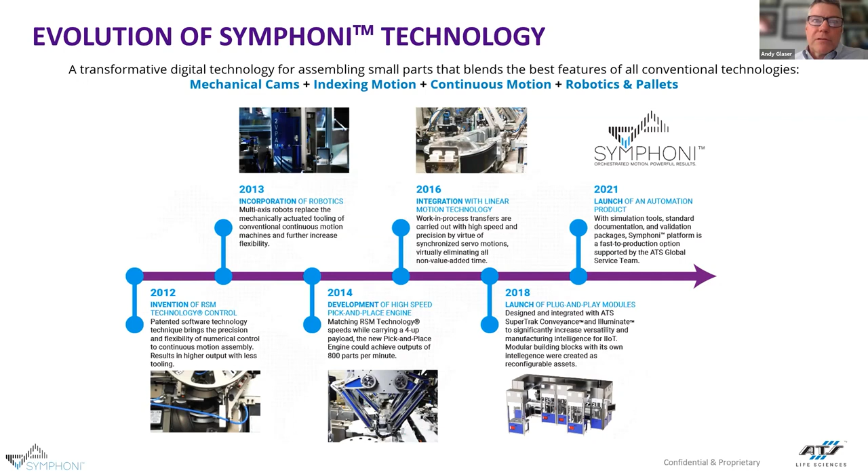So ATS recognized the game-changing potential of Symphoni. It's a standardized modular automated technology. It offers high performance, precision, and flexibility. In other words, a machine that didn't have to sacrifice speed for flexibility and vice versa, and a machine that offered an alternative to cumbersome, time-consuming custom solutions.

The best part about Symphoni for many of our clients is the fact that you can start with just one of these modules, as you see on the slide. You can use that module, and we call it Sonata, for research and development, your clinical trials, for prototyping, before you have to go into low output or higher output. And then when you're ready to scale up, you can just simply add more modules.

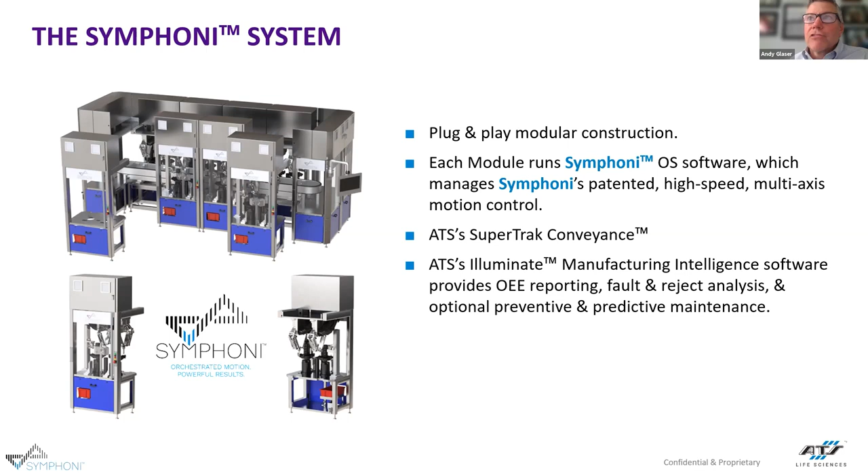This inherent potential for scalability and simplicity is a big part of what ATS saw as a solution to solve current assembly problems. The Symphoni asset is completely deployable, and that is a game changer. We also saw a far more specific synergy, a way to incorporate our SuperTrak conveyance technology and our Illuminate smart manufacturing software. These technologies significantly build on the core premise and make Symphoni the complete package it is today for anyone in the med device assembly business.

So what does all this give you? In short, Symphoni provides the lowest total cost of ownership because of its standardization, modularity, ease of use, and low maintenance. Symphoni improves product quality because of its gentle part handling with friction-free orientation. Symphoni reclaims expensive floor space because of its reconfigurability, as well as its ability to be continually redeployed throughout its life. Symphoni optimizes your assembly equipment due to its operational flexibility and quick changeover.

Thus, the core Symphoni DNA made up from these attributes is why there is now a totally different approach to how high-speed assembly can be automated. Faster time to market, reduced capital investment, and a lower overall price per part translates to a big advantage for manufacturers. In 2018, when ATS acquired the Symphoni IP and joined the journey of this technology, our CEO, Andrew Hider, said that it was to develop market-leading solutions. With today's generation of Symphoni, we have already demonstrated with real customer projects, we are leading. Now it's time to see for yourselves what I'm talking about.

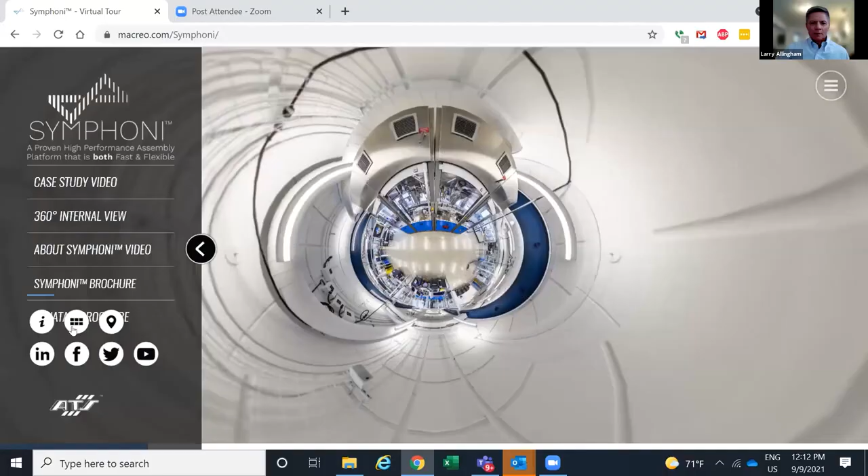So what I'm going to do is first orient you as to what it is that we're going to take a look at and also where it's located. So as you can see on the screen, we've got a Symphoni machine or Symphoni cell, if you'd like to call it that. And this is located at our Innovation Center at ATS in Cambridge, Ontario. So I'll just do a little bit of a scroll here so that you can see how the machine is situated in our Innovation Center, where we're featuring, as well as Symphoni, other examples of ATS technology.

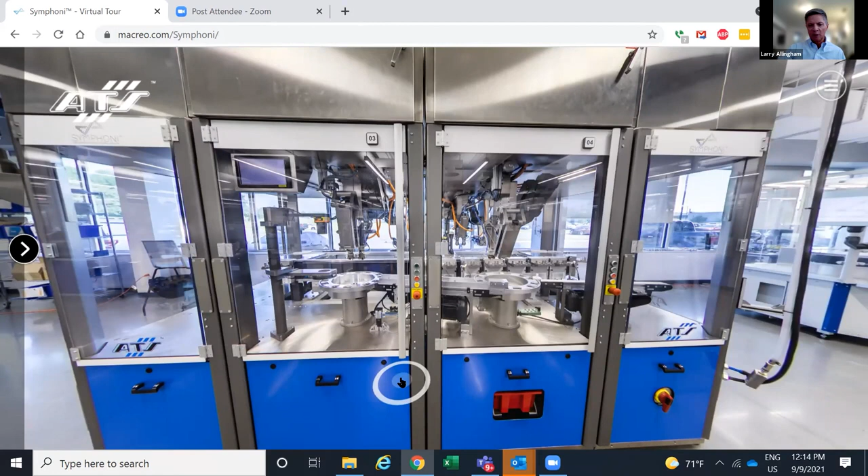So before we plunge into details of the machine, I'll just make a few introductory comments to reiterate some of the points that Andy mentioned and that Peng mentioned in the lead up. So again, Symphoni is the technology. It's designed as a unique combination of high speed and flexible assembly automation, and it's packaged in a modular format, which gives it configurability and reconfigurability, meaning that it's effectively serving as a long-lived asset that can be repeatedly retooled for different applications if need be. So first, to orient you a little bit into what you're looking at here, as we've mentioned a couple of times, Symphoni is modular in nature.

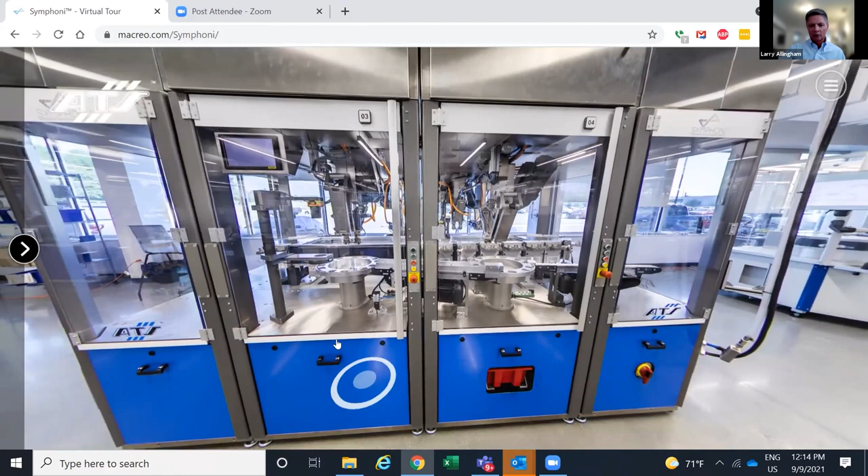And this small cell that we're going to use as our walkthrough this afternoon is certainly an example of that. So you'll notice that this, where I'm taking my cursor here, basically corresponds to a module or a working module. We have two working modules on this side of the machine, two working modules on the back side of the machine, which we'll see a little bit later, and then two other modules that are on the end that we typically refer to as end caps.

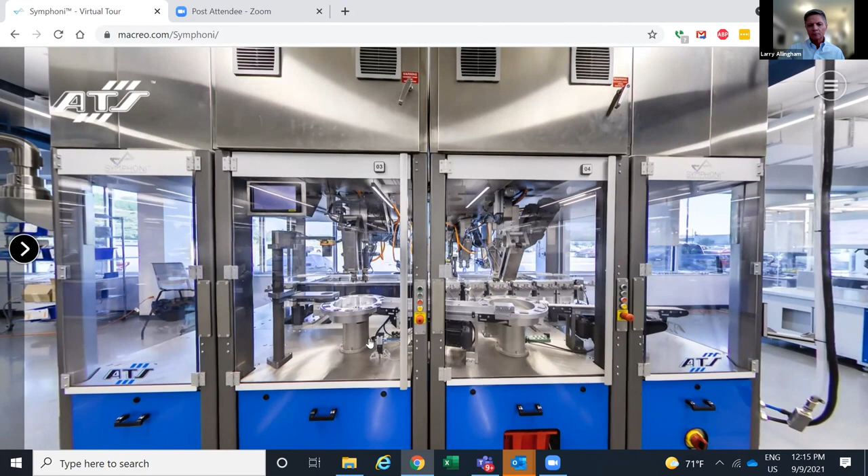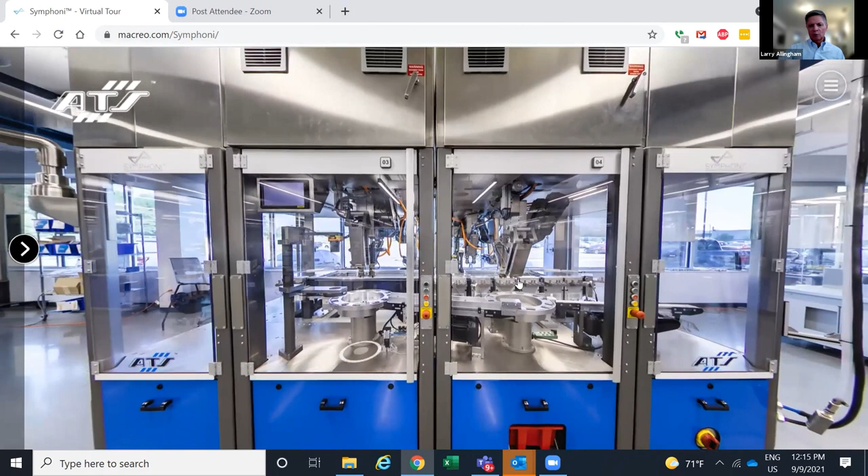One module that receives the main power, electrical power and pneumatic, for distribution through the whole system. And the other module that houses the electronics that control the SuperTrak conveyance, which is the basis of the transport mechanism for moving work in process through a Symphoni system. So to give you a sense of scale, each working module is 1 meter in width. So that gives you a little sense for the size of what we're talking about here.

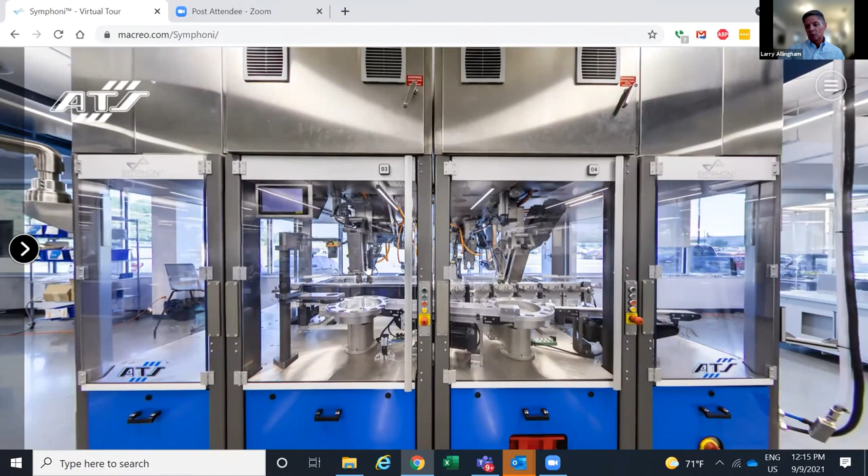And you'll notice that within each module, there is mounted above it an electrical cabinet. The electrical cabinet serves to house all of the controls for the local control of the automation that's resident at that particular module. So in other words, the control is decentralized, yet integrated in a centralized fashion, which you'll see momentarily, to allow the system, when it is running, to operate in a fully synchronous fashion.

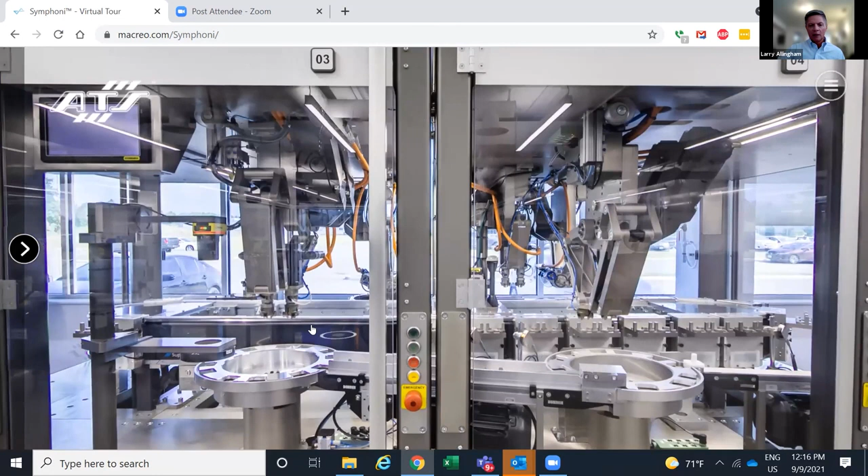So I'll zoom in a little bit and give you a closer view of what we're going to be touring through here. The demo unit that we have basically consists of 4 assembly stations. We're assembling a dummy product. Basically, we're assembling and disassembling repeatedly a simple 2-piece assembly, but a product nevertheless, that allows us to showcase some of Symphoni's operating features.

As I mentioned, the backbone of the system, or the transport mechanism, Symphoni being palletized technology, is the ATS SuperTrak. We'll take a look at that in more detail momentarily. And you'll see that the workstations consist of a series of robotic stations where we have these Delta robots that are mounted effectively from above, again, resident in each individual module. So I'm going to zoom in here, open up this door, and take a walk in and allow us to explore a little more deeply what we have.

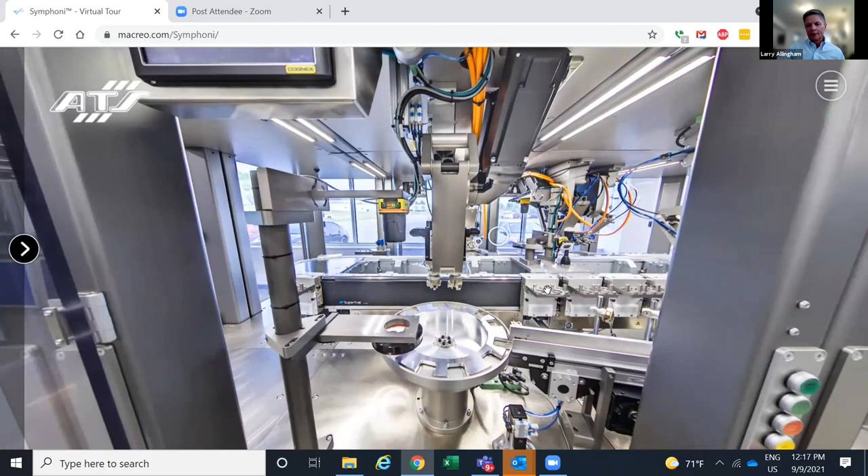So I've mentioned a couple of times the SuperTrak conveyance. Just a few words about SuperTrak. As Andy mentioned, that was one of the additions that have been made to Symphoni technology since ATS acquired it. Basically, using this long-running flagship product of ATS that's been in operation for 20 years or so as the basis of moving materials through the system.

So SuperTrak is a linear motion conveyor, which basically means that the pallets in the system are moved electromagnetically. That gives very high speed capability for the pallets with precise control of their accelerations, decelerations, and positioning. And we're able to stop pallets at any point along the SuperTrak without requiring lift and locate mechanisms or any other type of external stopping or positioning mechanism. So it gives a lot of flexibility, very clean, low wear, high speed operation.

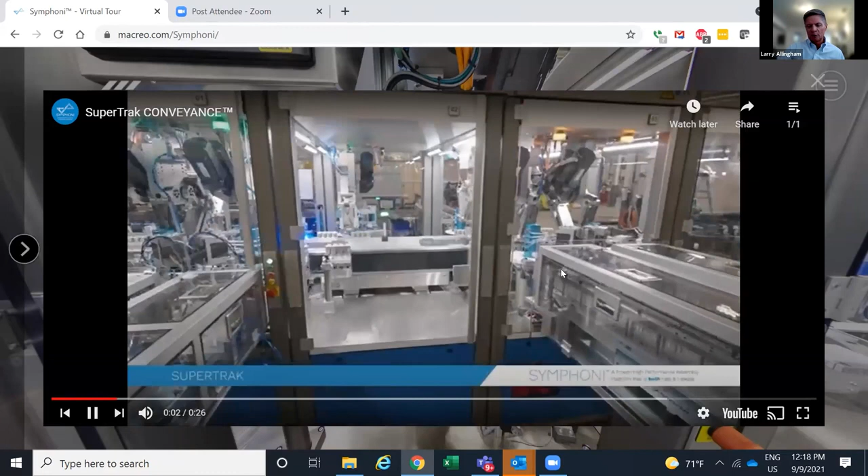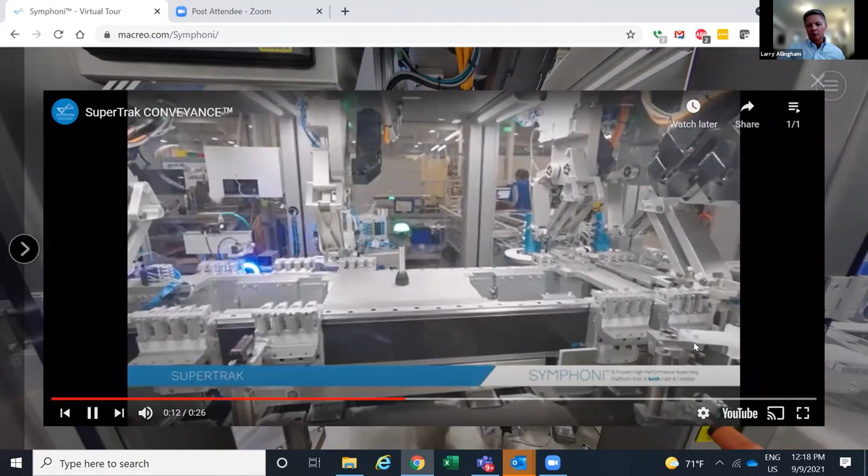So I'm going to click this link here and allow you to take a look at a Symphoni system with SuperTrak in operation. It's not the demo machine, it's a production machine as it was being readied for a factory acceptance test at ATS recently. I'll let this video run through a couple of times, but you can see SuperTrak pallets moving freely, positioning themselves at different points, again, accelerating and decelerating rapidly to precise positions.

And you'll see repeatedly as we go through our demo this afternoon that when SuperTrak is integrated into a Symphoni system, effectively we're able to take advantage of the high-speed positional accuracy of the SuperTrak pallet, synchronized with the motions of the high-speed Symphoni robots, such that pallets spend the bare minimum time necessary in each individual workstation to allow the operation to take place.

So returning to the demo again, to the unit that we're focusing on, we'll take a look first at this particular station, which is kind of characteristic of what you'll see throughout Symphoni applications. It's what we refer to as a pick and place station. Sometimes we call it a pick and place engine. But basically what it consists of is this high-speed Delta robot. We'll talk about that a little bit more momentarily, but as I mentioned before, it's mounted from the ceiling of the system.

And what the robot does is it interfaces with this device, which is what we call an RSM disk, or rapid speed matching disk. Andy mentioned that term in his lead up, rapid speed matching. And you'll see what this really does when I start playing a couple of videos for you. But effectively what the RSM does is it serves as the intermediary between the robot, the pallet, and an external feed system for parts being delivered into the system.

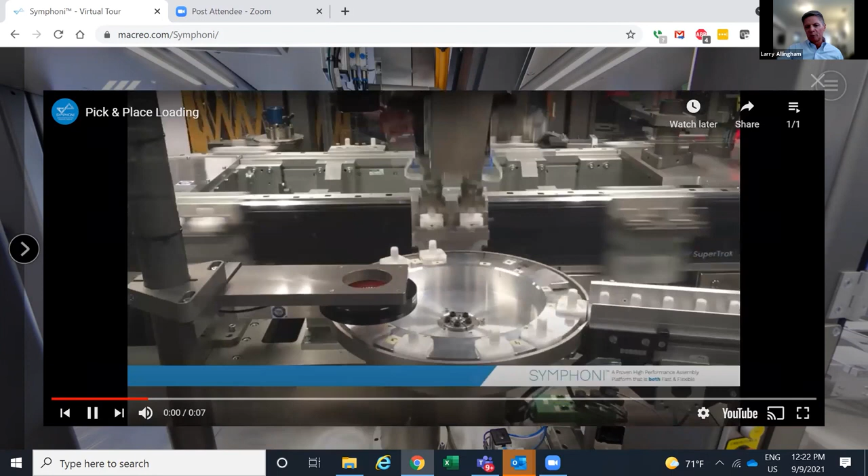And what this also does is very clearly indicate, again, what is unique about Symphoni, because as you're seeing, as I let this video run repeatedly, high speed pick and place operation. Parts coming in, the parts can come in random radial orientation. Our camera takes a picture of the part. The robot with its rotary end effectors picks the parts out of the disk, during the transfer to the pallet corrects the radial orientation, and places them on the pallet.

And again, with SuperTrak's high-speed capability and precision positioning capability, you can see that there's a very minimal amount of time that the pallet is actually in the station, and that the operations are carried out such that we already have the parts in hand in the robot as the pallet arrives. So really eliminating all of the non-value added waste that typically occurs in an assembly system, a palletized assembly system in particular, where you're waiting for a pallet to come in, waiting for a signal to say, okay, I can start my operation, carry out the operation, and then move on.

In Symphoni, everything is effectively electronically cammed together, all motions in the system, in such a way that we have complete synchronous operation, as if everything were mechanically geared, as if every single motion were on a line shaft. But it's digital and configurable and flexible, which is what gives it its unique power.

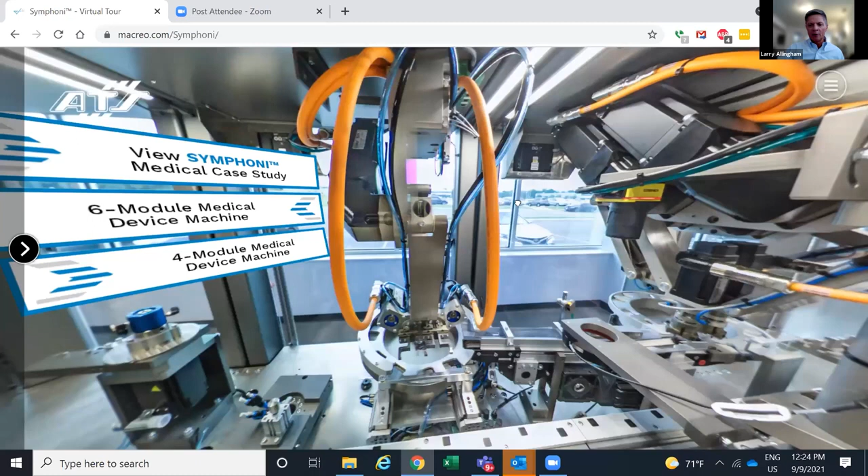So we'll jump in a little bit deeper here. Again, just taking a quick tour around to see some of the other stations that are in the demo and point out some other features of the Symphoni technology. So the station that we just took a look at is this one right over here. We saw it from the view on the outside. This was the station just upstream of that that's delivering the parts to this particular station for orientation and placement. But taking a look here, we can get a little bit better view of what's going on with these robots, which are mounted at various stations around the unit.

So just a little bit of background on why is it that we have a customized robot as part of the Symphoni system? And there's a couple of reasons for that. It wasn't the original intent when we were developing the technology. We thought maybe we could use standard off-the-shelf robots, particularly high-speed deltas, to be serving as the basis for our operations.

But we quickly discovered that, because of communication requirements with external controllers and things of that nature, we couldn't get the throughput that we wanted to achieve with Symphoni with off-the-shelf robots. Furthermore, we needed to have the ability to do some pretty significant force-bearing operations that are characteristic of most assembly applications. Typical Delta robots that are commercially available just aren't designed for that. They don't have the strength in their linkages to permit those types of high force applications.

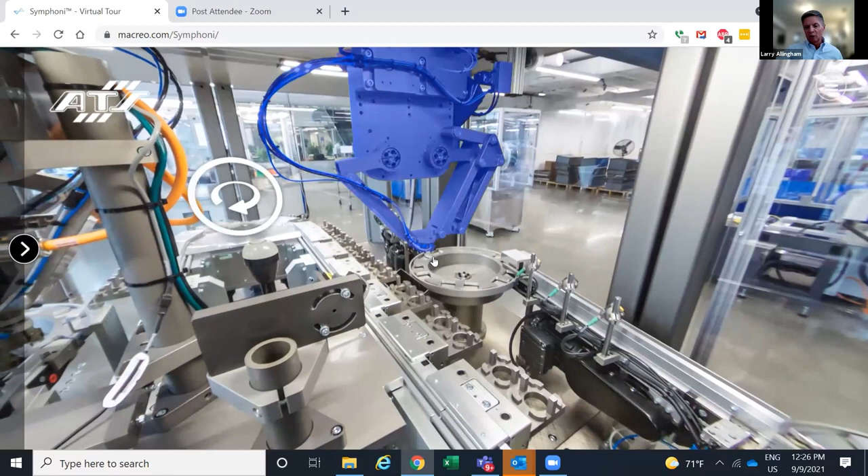And we're moving quickly in a very narrow band. We're just moving basically between the disc and the pallet. So we have a relatively short stroke in, let's call it the Y direction, and we also have positional capability in the Z location as well. And then, depending on the type of end effectors that we place on the end of arm tooling, you see different examples of that, we'll see more as we go through, we can carry out additional servo-based operations, whether it's inversions or radial orientations or what have you.

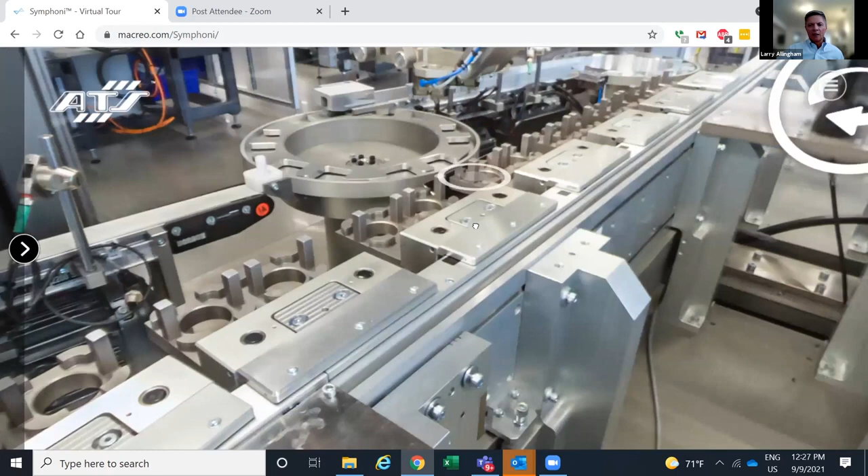Go down to this end of the system, and hopefully I won't make you too dizzy here by spinning around slowly and taking a look at the system from this particular perspective, and zoom in a little bit here and see some examples of different types of end effectors. This end effector here, again, everything above the end of arm tooling is completely standard. The end of arm tooling is first configurable with what we call a deck, and then part specific touch tooling that's added to the deck to allow us to carry out different types of operations.

This end of arm tool is designed to do an inversion operation to rotate a part 180 degrees. And then, as we've seen before, we have end effectors that can be equipped with rotary servos to do radial orientation. Again.

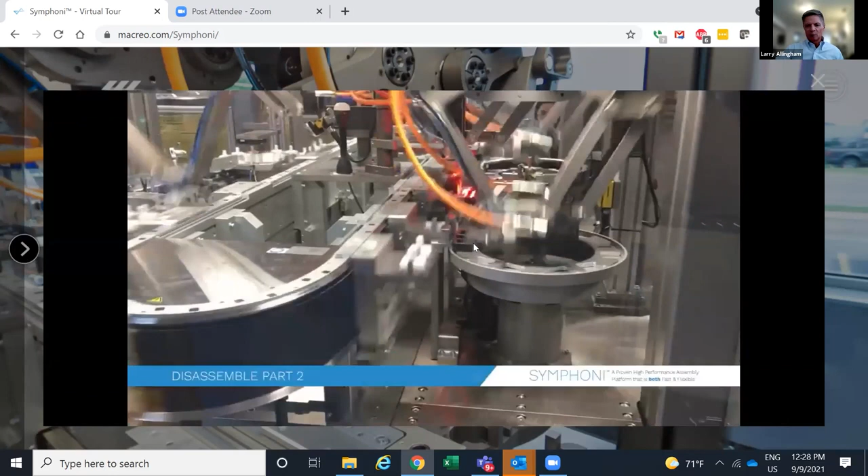So just to allow you to see a couple of other videos here to give some examples. Again, same demo unit. This particular station is doing a disassembly operation of a second part that has been assembled, placed back onto the disc and delivered back to the previous station for loading.

So just a point of note, the videos that you're seeing in the demo, we're operating obviously in a 2-up palletized environment. The output or the throughput of this system is 280 parts per minute. That's far from the maximum capability of Symphoni.

The Symphoni robots have been designed to stroke at a rate of up to 200 strokes per minute. Typically, we limit the stroke rate that we use in actual applications to 150 per minute, which means that at any given station, we can typically process in a 2-up environment 300 parts per minute, which again, for palletized assembly systems, now we're getting to speeds that are much more characteristic of hard tool technologies like continuous motion.

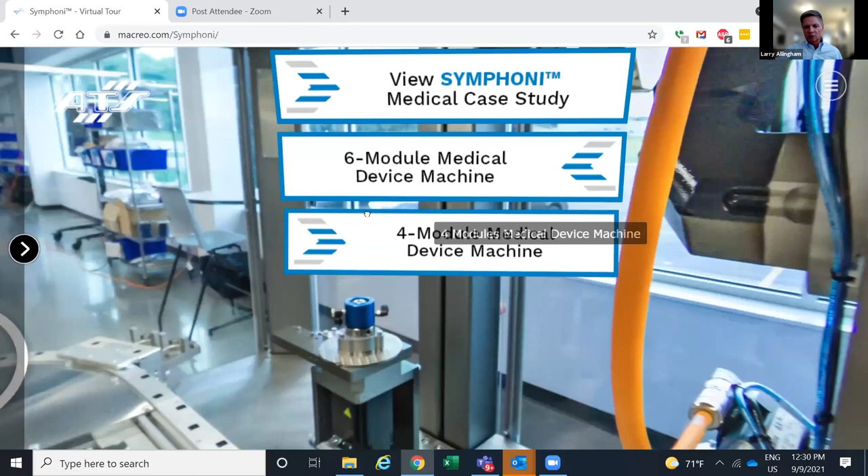So we'll leave the demo unit momentarily just to take a quick look at a couple of other smaller 3D tours that we have of a couple of production systems. This is a medical device assembly system. And here we actually see what a system looks like when we've got it configured with external feed systems.

So as is more typical than what we're seeing in the demo that we're walking through here today, external feed systems feed parts into one of these RSM discs, which are then captured, oriented if necessary, or checked for orientation if necessary, and then the robot makes the placement to the pallet. This particular system, I think, has a total of 4 working modules associated with it. We have another one that I will show here that's a little bit larger, with 6 modules.

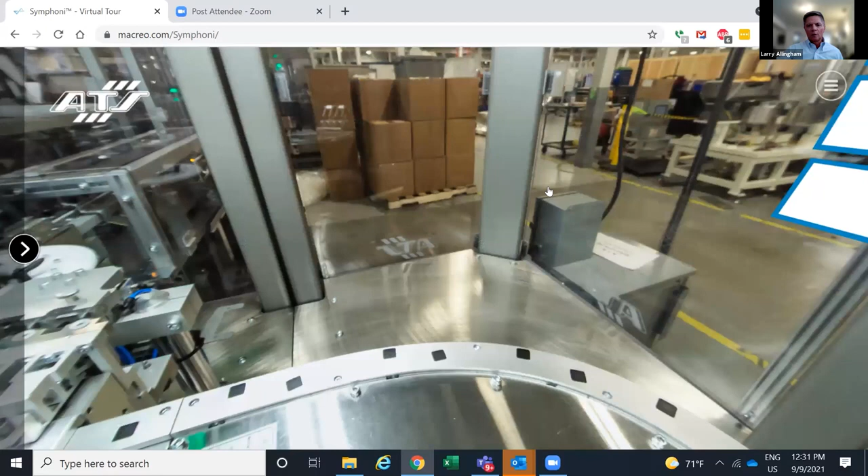But again, you can get an appreciation, I think, for what you're seeing here in terms of the very high level of standardization. So completely different products, different physical configurations in terms of number of modules, but again, very, very high level of standardization. Basically, what's changing at any given workstation, particularly for assembly operations like pick and place, is just going to be the disk, which happens to be specific to the part, and the touch tooling that's interacting with the part itself. And of course, pallet fixtures are going to be specific to the product as well.

But the robots themselves, the control system, the overall infrastructure, a very high percentage of the total investment is taken up in completely standard, configurable and reconfigurable assets. And this can become extremely important in situations where, for example, if you're a customer that has multiple variants to your products, or multiple products that you would typically be placing on separate machines, in many cases, those can be grouped together into one high-speed Symphoni system with quick change tooling between one product and the next, allowing you to conserve capital, conserve floor space, etc.

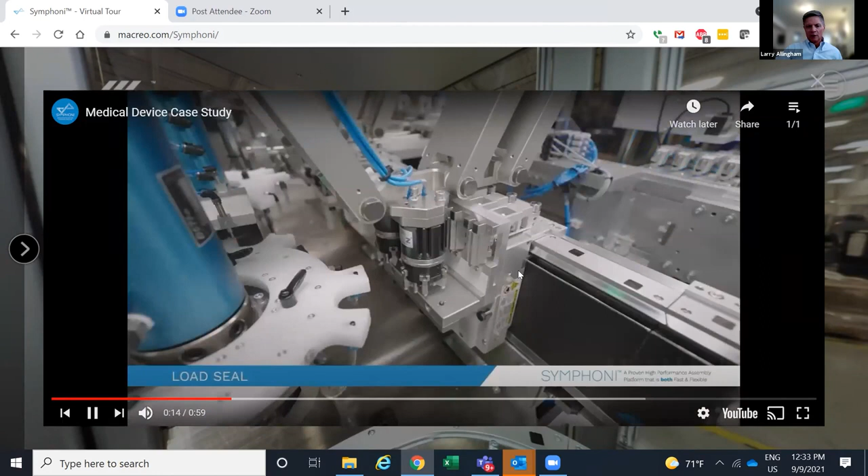So while we're on the topic of medical applications and real world applications, I'll let this video play. Which again, this isn't the demo unit. This is an actual production machine assembling, I believe it's a 4-piece medical device. This is again taken during preparation for FAT at ATS. Here we're seeing high-speed placement of O-rings, assembly of a device to the seal, assembly of a third component, assembly of a fourth component. We're operating in a 4-up environment here. I believe the output of this machine is 300 parts per minute.

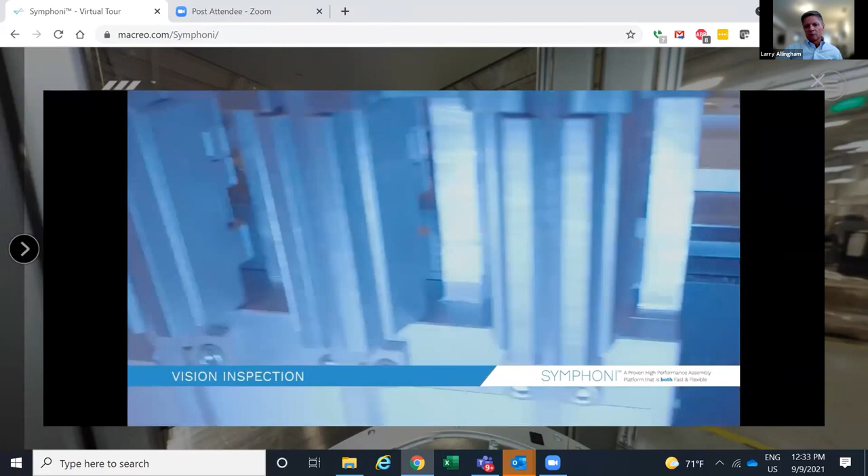And this we're doing, again, taking advantage of SuperTrak's ability to rapidly stop positions. What you just saw there was a series of inspection operations, doing final inspection of the assembly before it gets to the unload station.

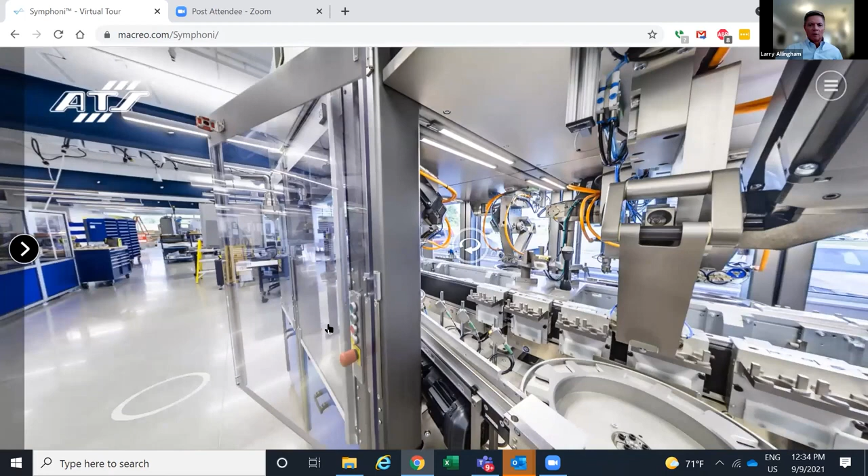So back to the demo unit. I'm going to exit the interior of the machine. Bear with me as I spin us back around to where we can see, it's right back here. So we're back to the front of the machine again.

One thing that I wanted to point out as well, I've mentioned that the system operates with decentralized plug-and-play modules, but when the system is in operation, you have a completely integrated motion such that all motions in the system are basically electronically cammed together. So even though each module is basically controlling what's going on at its individual module, it's doing so with reference to a master cam, which in most cases is the SuperTrack pallet system itself. It's kind of defining, in a 360-degree cycle, each point in that cycle, serving as the master cam for all other motions, all other devices, and all other modules to be specifically referenced to.

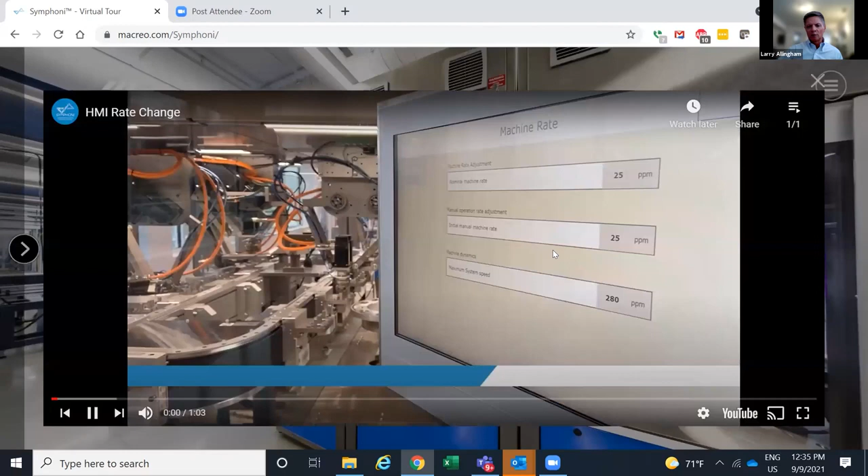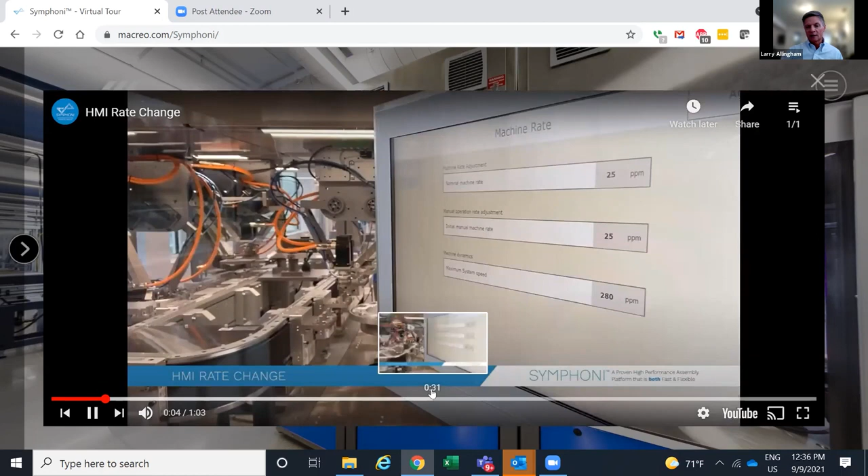And that allows us to do some very interesting things, which I'm going to show you by taking a look at the HMI, an example not only of what's possible through the HMI, but also of how the system functions in this integrated fashion. So what you're seeing here is the operator has come over and is changing the speed of the system, repeatedly toggling it between 25 parts per minute and 280 parts per minute. The 280 parts per minute is the design rate of the demo system. 25 parts per minute is just an arbitrary number, let me just back this up and let this run a little bit more, arbitrarily selected. The operator could select to run the machine at 100 parts per minute, at 150, at 1 part per minute.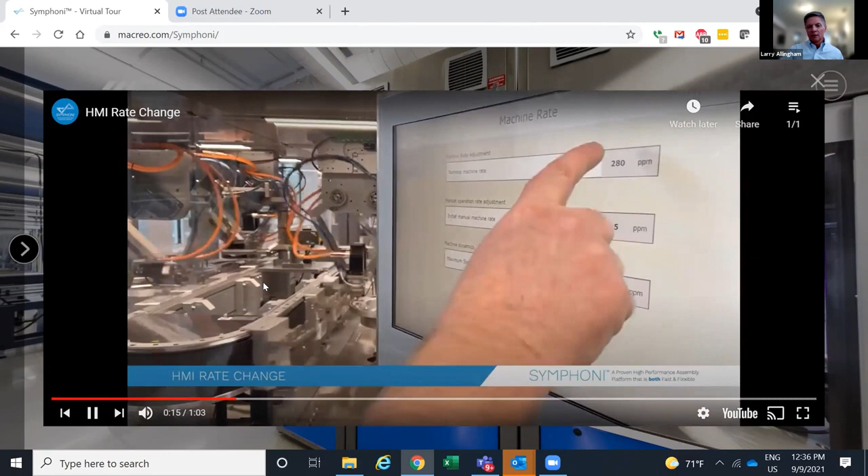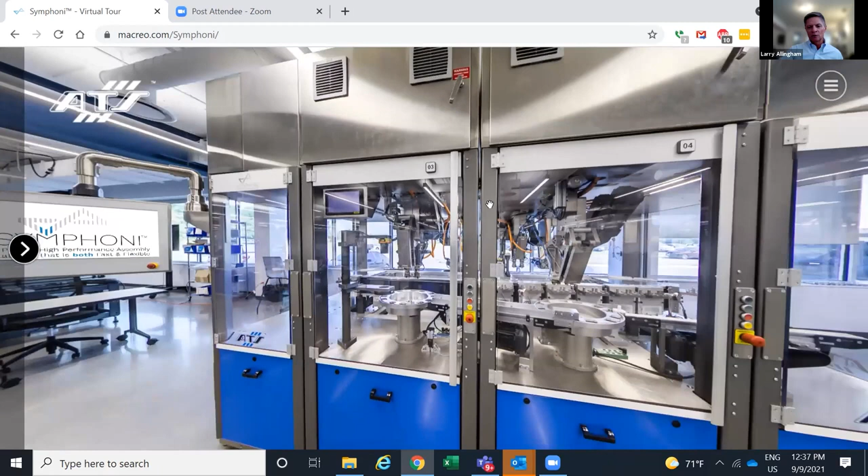And regardless of the speed that's selected, you see the same integrated, synchronized motion system-wide. Again, this is a reflection of the control methodology with its electronic camming control, and as well the efficiency of the system in terms of the minimization of non-value-added operations, basically eliminating waste, allowing the very high throughputs, but in an environment that is digital, flexible, and highly standardized.

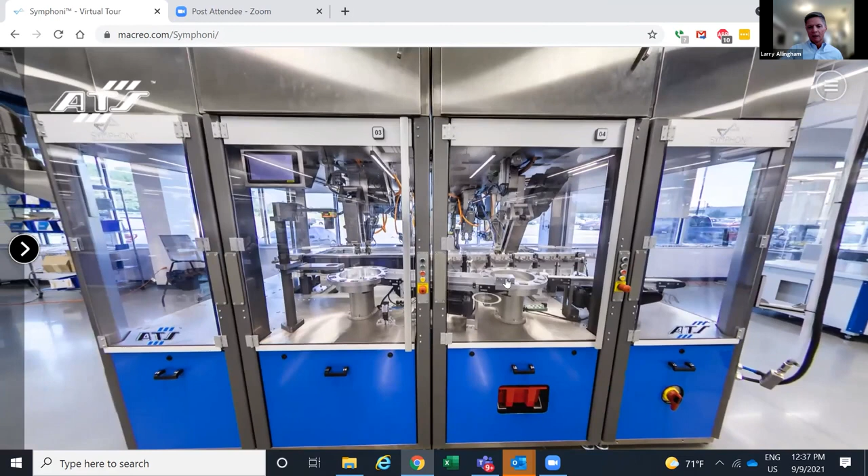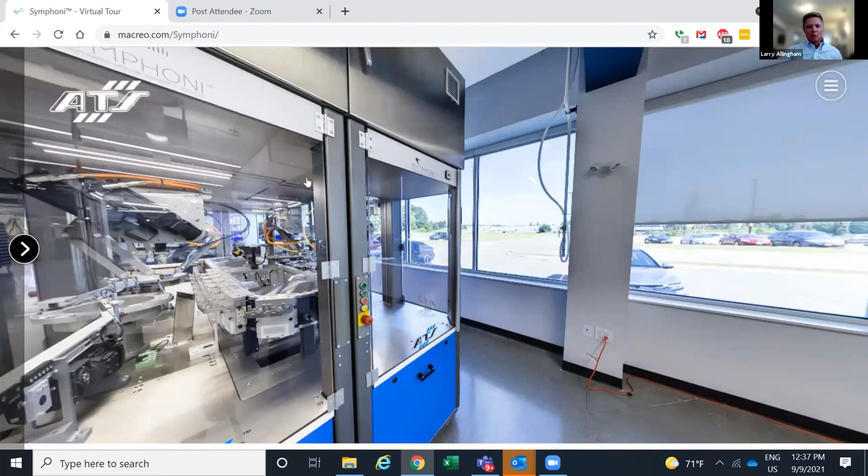So we'll maybe conclude just by giving you a couple more views of the system, walking you around to the backside if I am adept enough to get us there. One other thing that I'd like to point out, which you can see on the back side of the machine here, if I can get us there.

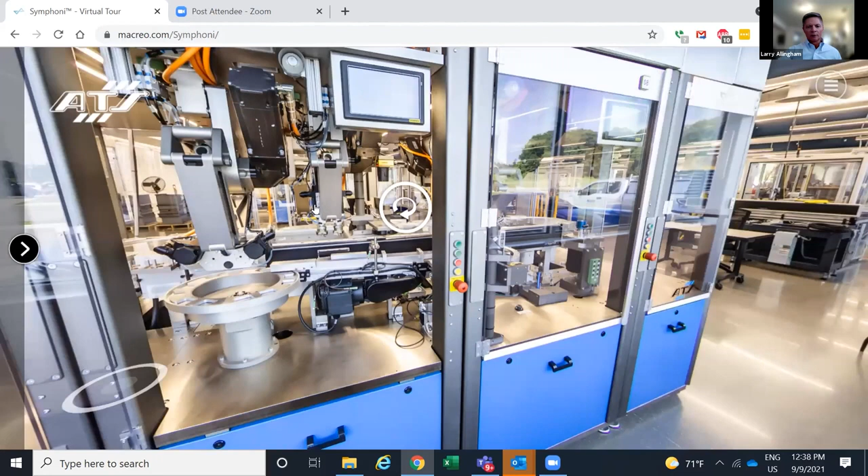And that is that in most cases, what we've seen on the demo, we've seen one robot per module, but as shown here in this particular module, we can house up to 2 robotic workstations within a given module, this being a single module, robot 1, robot 2. So again, that also enables us to have a nice, densely packed, compact system that conserves floor space, and gives a very high output per square meter of floor space. Another very good feature benefit of the Symphoni technology.

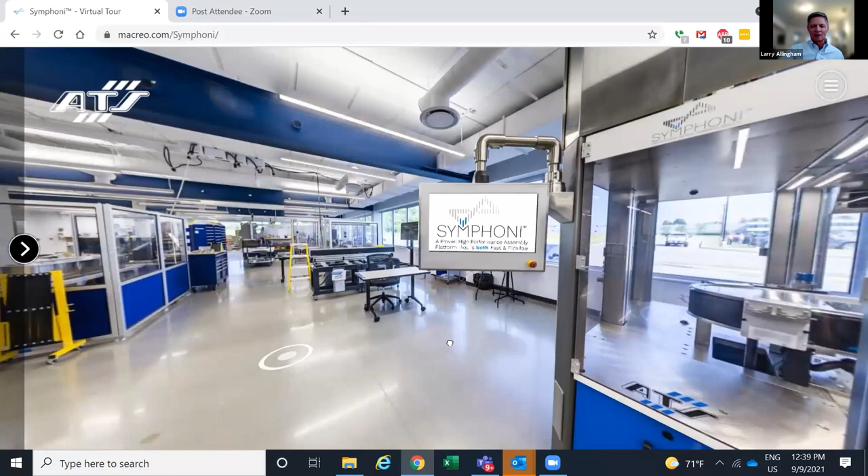So with that, I've given you at least what I hope is an initial high-level overview of the technology. Maybe the next best thing to being in front of a real machine is seeing what we've been able to take a look at this afternoon in this very brief 3D virtual tour. Certainly, again, this is a very high-level introduction. Certainly interested in responding to any questions that you may have either now or after the webinar, and would certainly be interested in exploring in much greater technical depth some of the features and benefits and operating characteristics of the system.

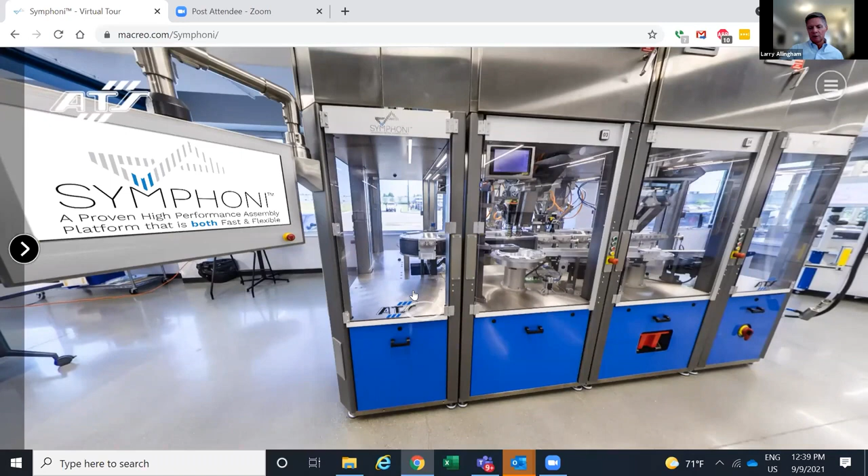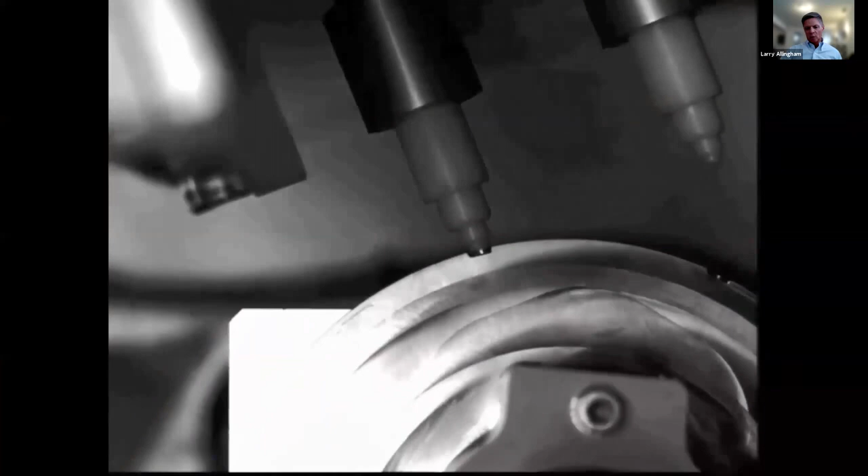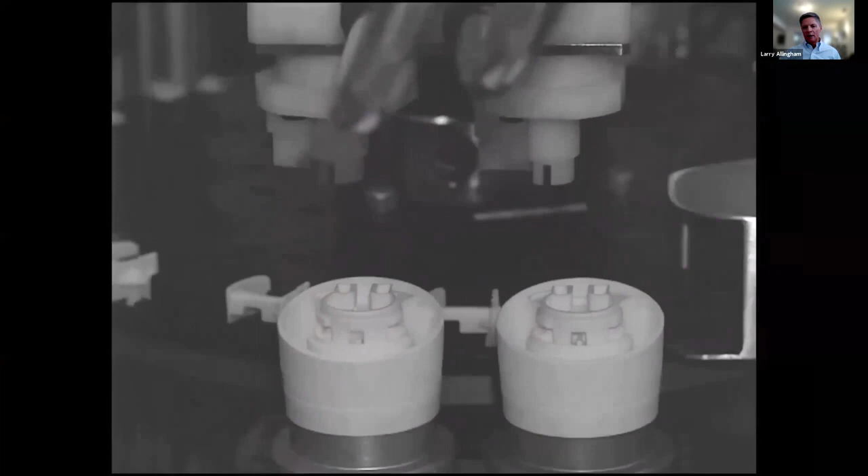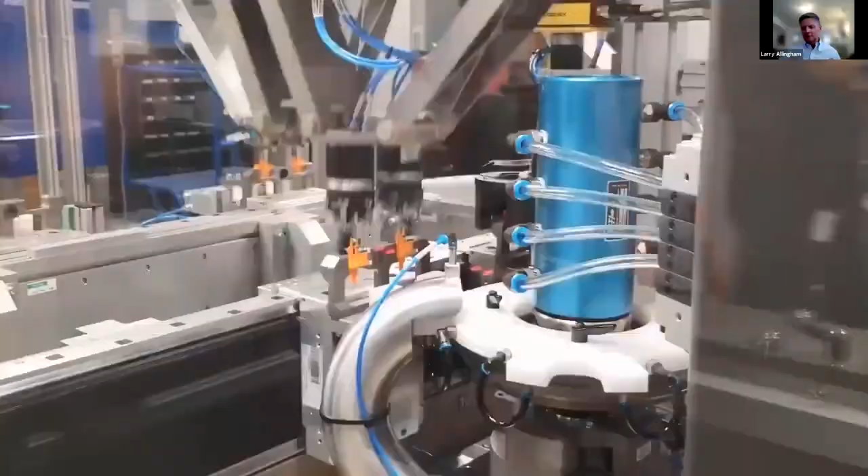So this video gives other examples of the precision and control that's possible with Symphoni. It's very important to show these sorts of videos, I find in my experience, because sometimes people's initial reactions when they see something operating at such high speeds is, oh my goodness, this must be good for very rough applications because it appears to be very violent. But when you really take a look at what's going on with high speed, as for example here where we're doing high-speed O-ring placement, in fact, things are carried out with great precision and great control.

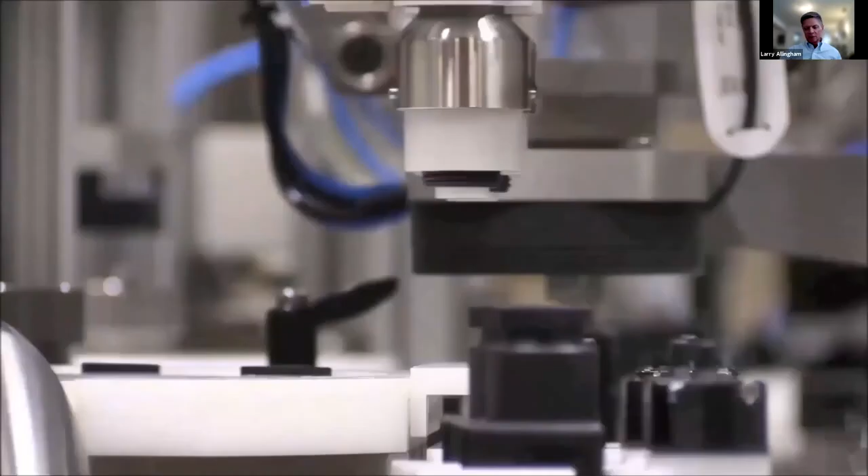Okay, question 1. What is the maximum force the robot can apply? Larry? That's a very good question. I hesitate to give the answer. I'm going to have to defer that question and get back. I think I know, but I don't want to give a number and find it to be wrong. So rather than say what I think off the top of my head, I'd rather get back to you with the real answer.

Fair enough. Question 2, is this platform already in healthcare and life science apps? Yes, absolutely. Okay, question 3, what is the pick and place payload? Again, another question that I'll have to defer and get back with a specific answer to.

I'm thinking this person might want to sign up for the Larry live interactive Q&A.

Hey, Larry, on the payload, though, it's several kilograms, right? I mean, it's going to be at least 1.5 kilograms to 2 kilograms, maybe even up to 3 kilograms. Yeah, well, the payload includes the end of arm tooling. Right. So it's the end of arm tool and the part, but I've got to believe it's at least 1.5 kilograms. I'm pretty sure it is, maybe even more than that, Andy. But again, I'd like to make sure.